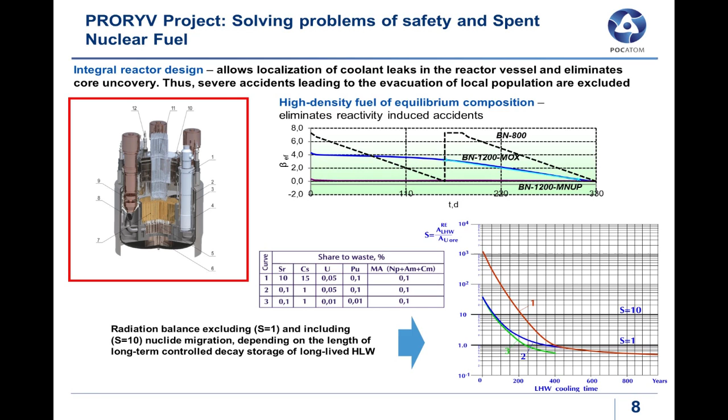There is a very interesting report here about coolant. I'm not in a position to read all of this chart, but I think it's very important what we have possibility with this coolant. We increase the natural circulation and decrease the loss of pressure. As an advantage, you also see this in the picture.

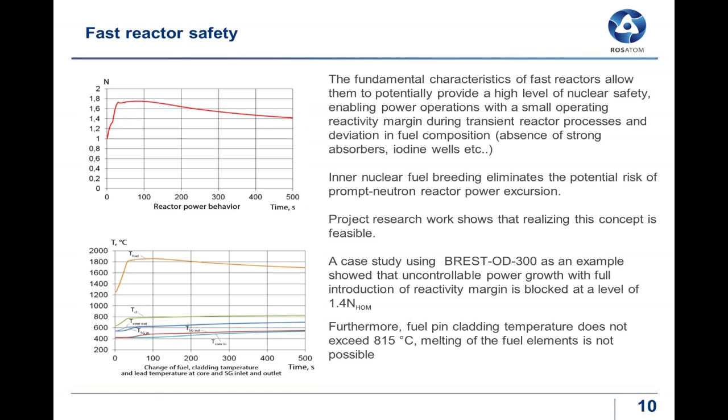This presentation exists in the files, so you can check that with this type of coolant, with this type of fuel, you have very good safety parameters which exclude evacuation of people even in a very severe accident. But the probability of such an accident is also very low. Please check it in the last sentence in this picture.

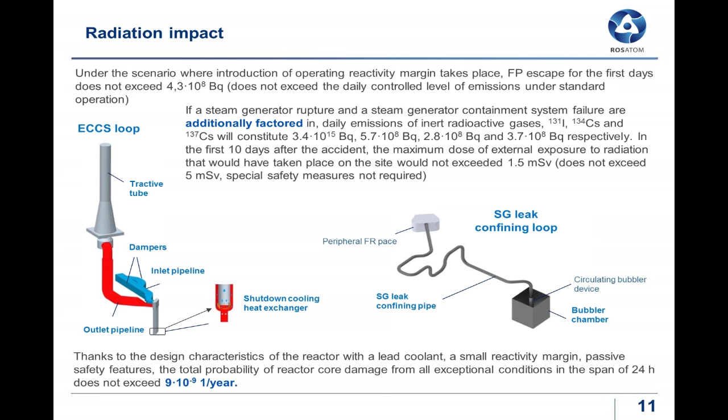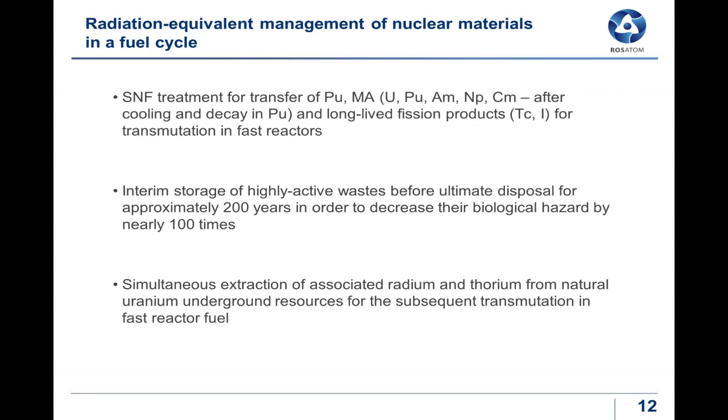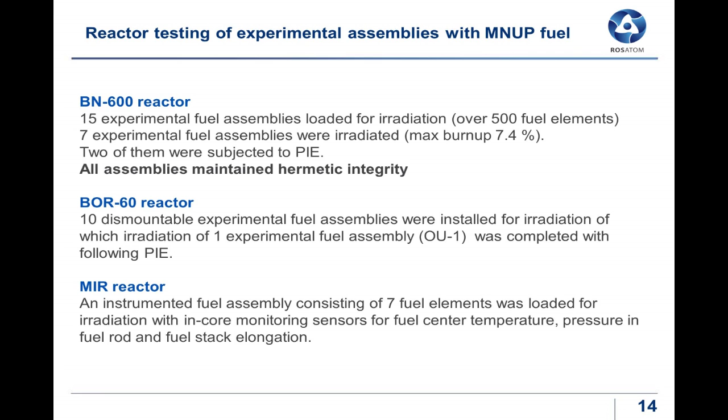There are several reports. In this conference, you will receive several reports which give details of such experiments, and I don't have the opportunity to stop on this.

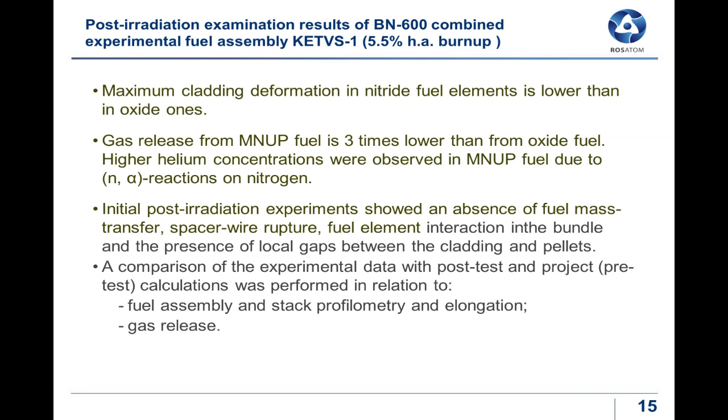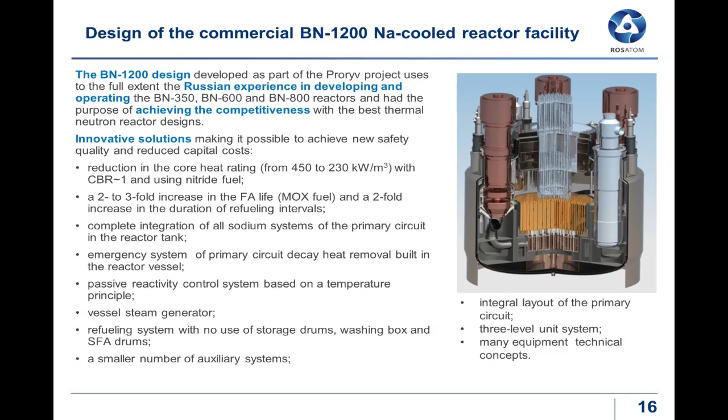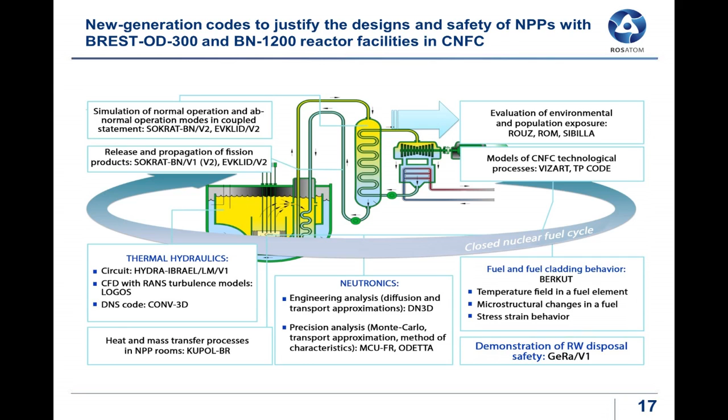Here you have information about new generation codes. Some of them are justified and some of them receive permission from the regulator. But for all of them, we expect this by the end of this period, 2020. It doesn't mean we finish the work this year, but what we do now, we think we will finish in this period.

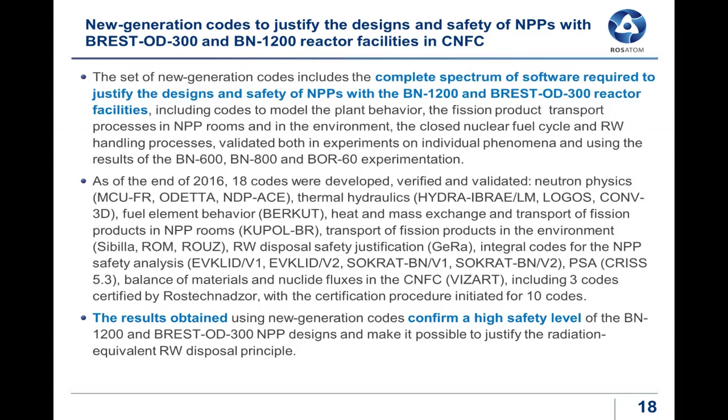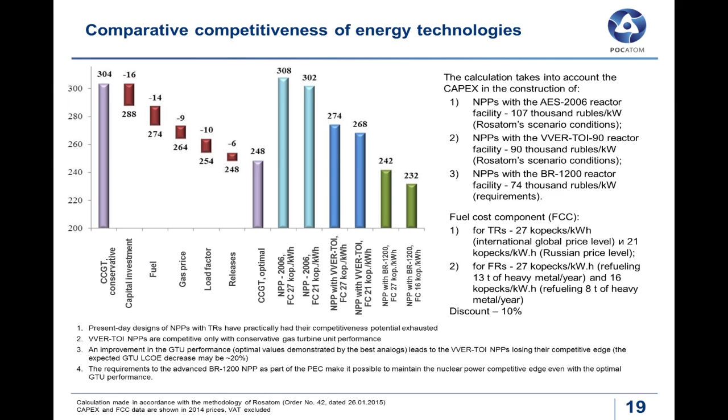There are three main conclusions. First, we not only have practice with existing sodium-cooled reactors, but in parallel we develop reactors with heavy metals, and a pilot project is now being developed near Tomsk.

In 5 years of the realization of this process, we think we will show the advantage of closed fuel cycle and fast reactors to resolve all the goals from which I began my presentation. Thank you very much.

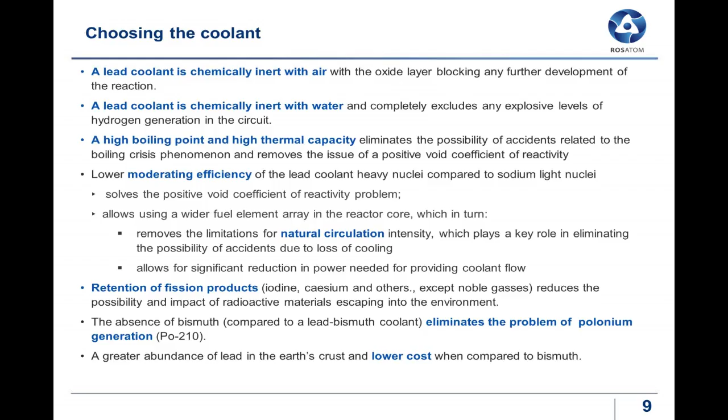Thank you very much for your question. Especially since you raised it, let me open this picture. You can check that all the goals can be resolved with all types of reactors, with all types of coolants. But with heavy metals,

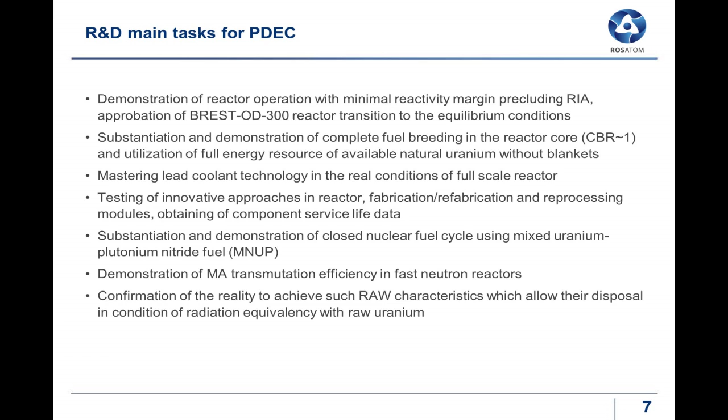we don't have such problems as fire or explosions, which exist when we use sodium. With lead or heavy metals, pins will have a bigger distance between them, and we have the possibility to decrease loss of pressure and receive better natural circulation. And there is no big difference between lead and lead bismuth.

Of course, if we use a eutectic of sodium and potassium, in such a case the melt temperature is room temperature. But if you use bismuth, lead bismuth, and lead, there are differences between them. In all cases, we need to heat the tubes to prevent freezing.

With bismuth, we have a problem with polonium. And lastly, the abundance of bismuth in the Earth's crust is not the same as lead. As a result, the price of bismuth is higher than the price of lead.

That's all. The next part of your question is why we develop both types. First of all, because we have more experience with sodium. And if we can resolve five of these goals with sodium, why not? And in the future, we can avoid the problems that exist with sodium if we succeed with lead. Thank you.

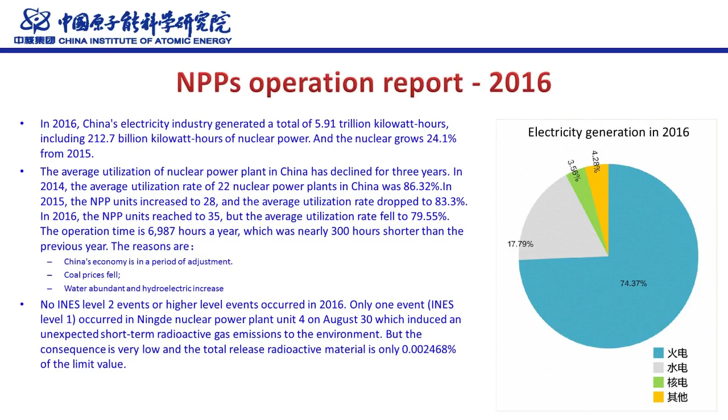There was no incident at INES level 2 or above. I think the PWR, or larger size nuclear power plants, and their continuous development is the base for fast reactor development.

So the second part is the sodium fast reactor. Last year our government issued the nuclear power energy development policy, focusing on safety and high efficiency.

We keep a development strategy in 3 steps: the first step is the thermal reactor, the second is the fast reactor, and the third is fusion in the future.

Now, and maybe for the next 10 years or more, the PWR is the main type of thermal reactor in China. We also plan for the closed fuel cycle to be developed alongside nuclear power stations.

So the task of the fast reactor, I think, is to support the sustainable development of nuclear energy, including raising the utility ratio of uranium resources, and the transmutation of long-life radioactive products from the reactors.

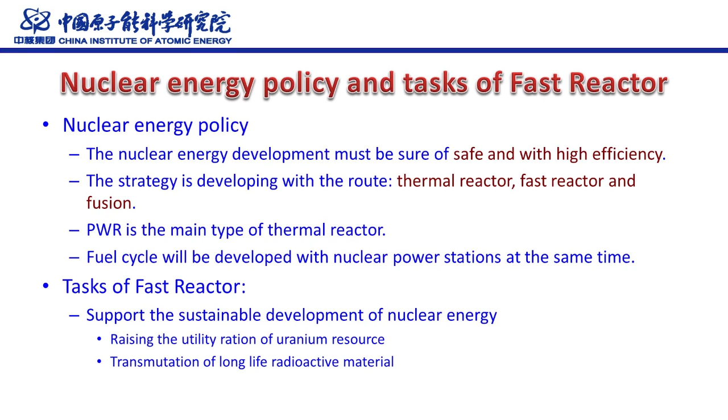Concerning the fast reactor development strategy in China, we can say there are 3 steps. The first step is CEFR, which has been in operation since 2010, and we already finished its construction.

The third is the commercial reactor, the China commercial fast reactor, based on operation experience of CEFR and the CFR600.

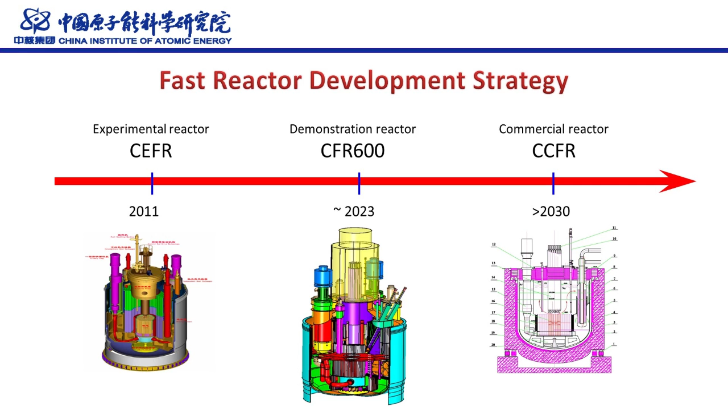As you know, CEFR is the first fast reactor in China. Its thermal power is 65 megawatts, and its electrical power is 20 megawatts. It uses uranium oxide fuel and is a sodium-cooled pool-type fast reactor.

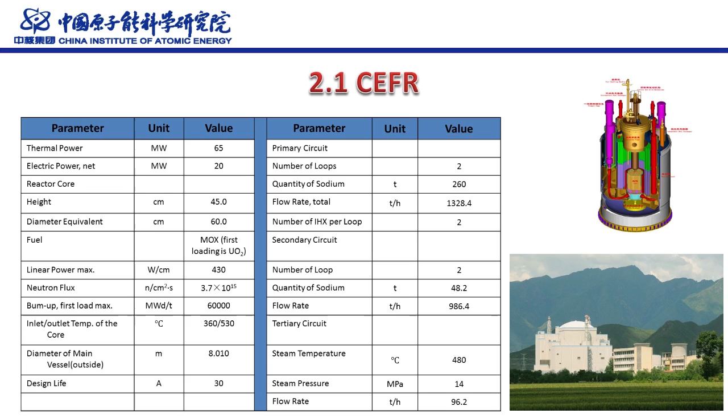In the last year, in 2016, the CEFR operated 23 days at nearly 40 megawatts thermal power. This means that for most of last year, the CEFR was in overhaul.

Overhaul includes periodic maintenance, such as the primary and secondary sodium pumps, and the fuel handling machine, and also update work. Update work includes the thermal insulation system, especially in the sodium loop rooms, and also the digital control system in the main control room.

We also needed to make some repairs and rectifications, including the nuclear island auxiliary system, instruments and industrial television system, radiation monitoring system, electrical system repair, safety system, and reactor protection system. So it was really hard work, also done with the support and help of Russian experts.

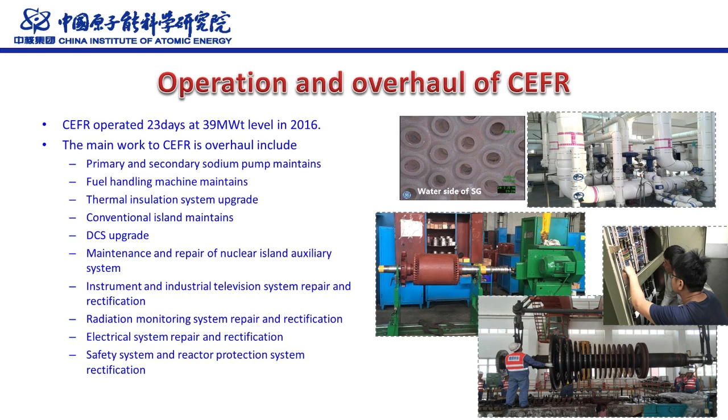And the CFR600 is just in design. We already finished the preliminary design and submitted the preliminary safety analysis report to the nuclear safety authority agency in China. The CFR600's thermal power is 1,500 megawatts, and the efficiency is 40%.

And we also consider using MOX fuel, and we keep the breeding ratio larger than 1.1. So we decrease the core damage frequency and the frequency of large radioactivity release according to the very high level required by our safety authority.

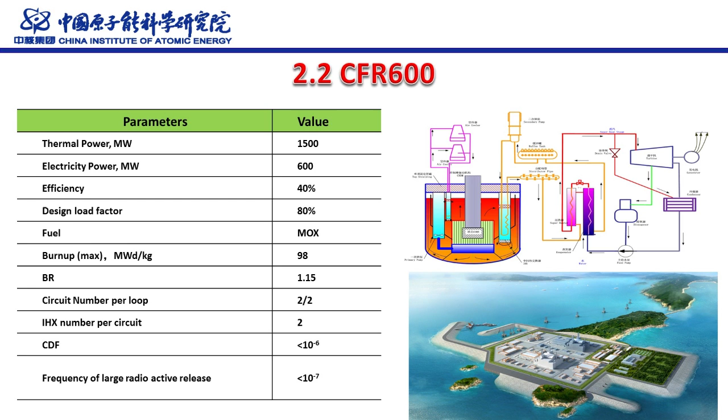In this case, we developed the sodium fast reactor fuel and core materials, focusing on the fuel cladding, including 316 stainless steel and the China-produced chromium 15 nickel 15 steel. Also included are ferritic/martensitic steel and oxide dispersion strengthened steel. Here I will introduce the CN1515.

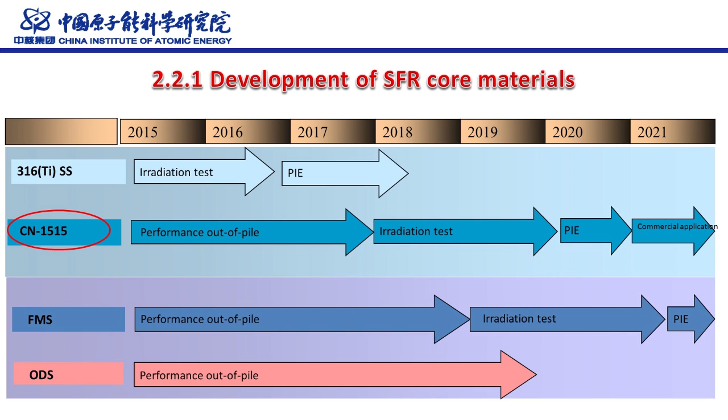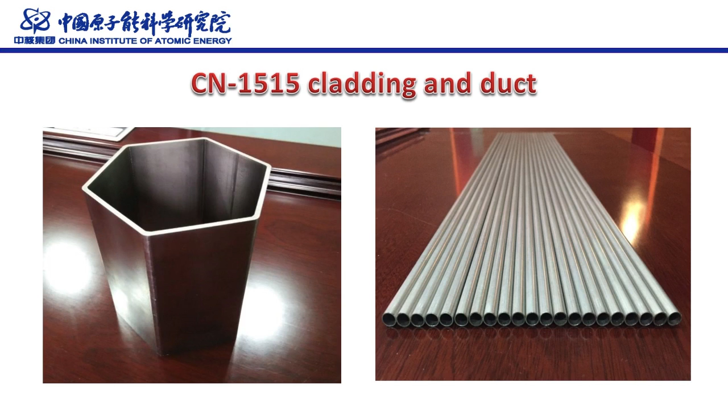We also have the plan for the irradiation test, post-irradiation examination, and after that, the application. Here is the picture of the CN1515 cladding and the duct fabricated in the factory. Also, we made the irradiation device for these materials. We will put it into the CEFR later.

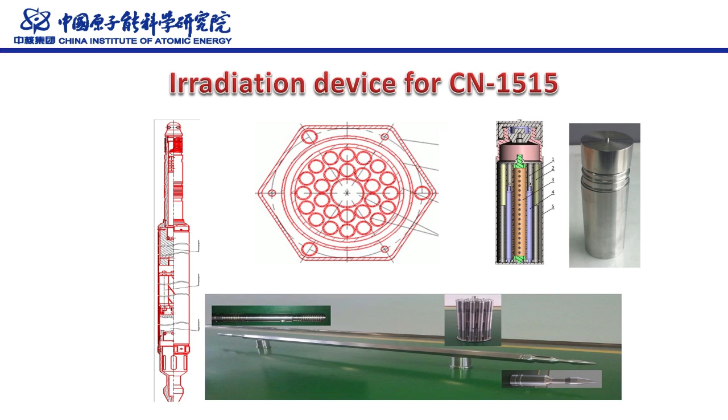About the ODS alloys, we combined with some organizations to develop them together, including the China Iron and Steel Research Institute Group, the University of Science and Technology Beijing, and also CIAE. We also got some parameters of the ODS.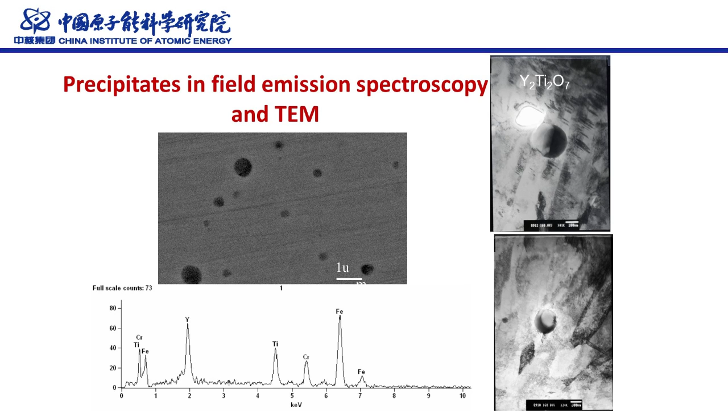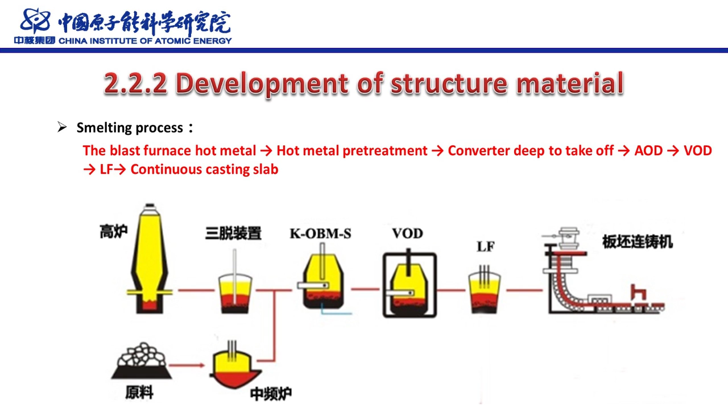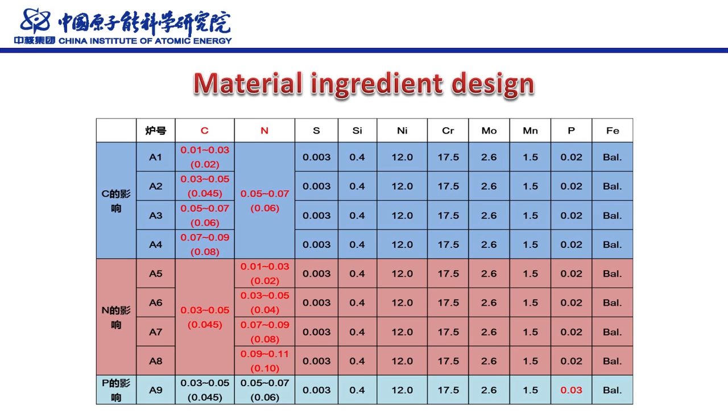We also got the materials ingredient design of the ODS, and we made the analysis of some elements' influence on this material. Some curves show the deformation resistance control of 316KD and 316LN stainless steel.

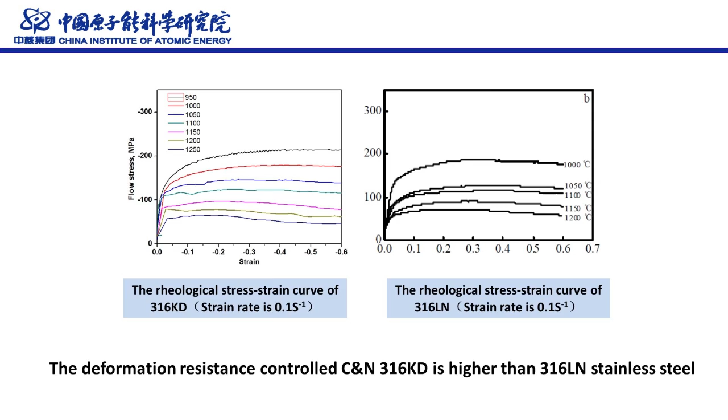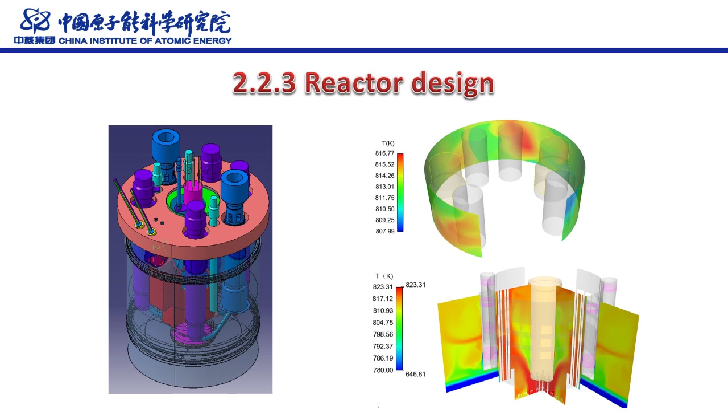Concerning the reactor design, here the picture shows the reactor block and, in the pool, some thermal flows, and the safety analysis results. So the next part concerns the fuel cycle.

In China, we consider the closed fuel cycle to include two steps. The first step is based on the fast reactor with MOX fuel. We use the MOX fuel fast reactor combined with aqueous reprocessing plants and high-level waste disposal plants to build the closed fuel cycle. We hope we can realize it before 2030.

After that, we also consider developing metal fuel in the future in the commercial fast reactor to get a higher breeding ratio, and to enlarge the number of nuclear plants based on fast reactor technology. Based on the metal fuel, we need the pyro reprocessing plants in the near future, near 2050.

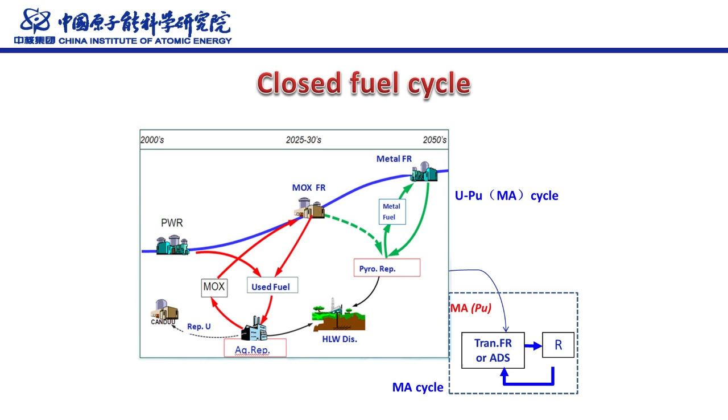The two steps: the first step is based on the CEFR, at laboratory level, for the closed nuclear fuel cycle. We built the CEFR, and then we used the reprocessing pilot plant. At the pilot plant, the pool storage capacity is 550 tons of heavy metal, and we also already built the reprocessing and radiochemistry laboratory, including 9 hot cells, 5 warm cells, and glove boxes.

So it's a big laboratory for radiochemistry, and we also built the MOX laboratory, including the 500 kilogram per year MOX fuel plant, and the CEFR test subassembly fuel is being made and will be put into the CEFR for irradiation.

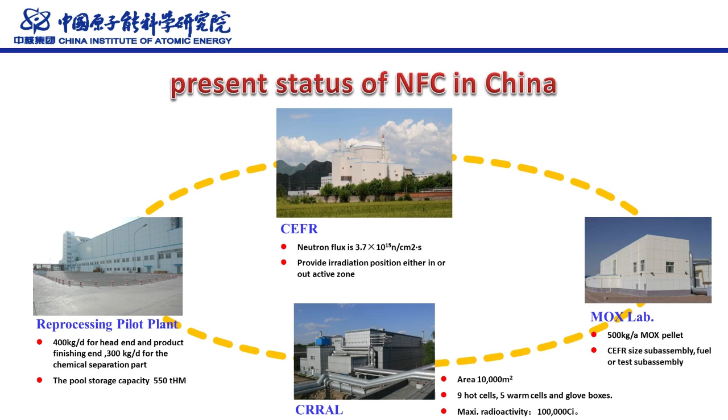The second step is the industrial development of the nuclear fuel cycle. In our consideration, in 2030, we will realize the middle industrial scale of the closed fuel cycle, including the fast reactor, the reprocessing plant, and the MOX factory.

Now, from 2008, the significant research project on reprocessing was initiated. And we have the plan to start the MOX plant and the fast reactors. Now it is approved by our government. And also, we selected a site to build the high-level waste treatment plant.

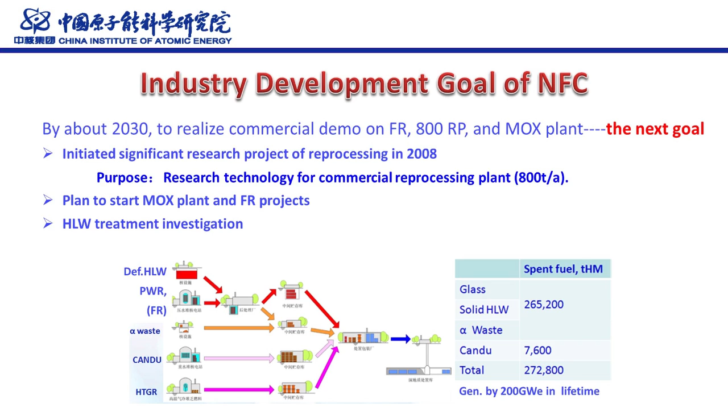So finally, our conclusion is that the nuclear energy of China will be significantly developed, with challenges. The challenges mainly focus on inland sites, and also the economy. As you know: cheap coal, the rapid electricity price decrease of solar and wind, the high capital cost of nuclear power plants because of the high safety requirements; that's also the challenge.

And the second point is that in China, several new generation nuclear energy systems are under study to meet the future demands. These include the sodium fast reactor. Also, we have the plan to build the traveling wave reactor, and the lead fast reactor with the accelerator-driven system, and also the molten salt reactor and very high temperature reactor in China.

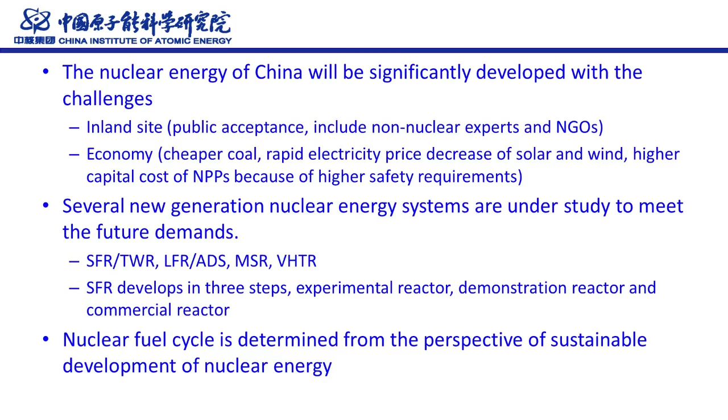When we talk about the sodium fast reactor, we also consider 3 steps. The experimental fast reactor is CEFR, the demonstration reactor is CFR600, and the commercial fast reactor in the future after 2030. Finally, we say that the closed nuclear fuel cycle is decided from the perspective of the sustainable development of nuclear energy.

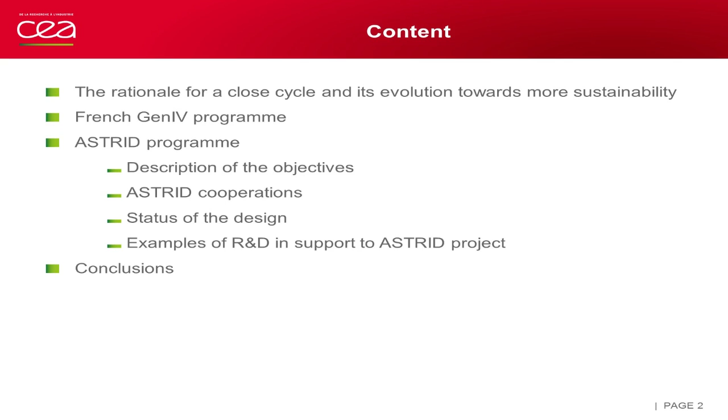So let me begin with an introduction on the closed fuel cycle. Spent fuel reprocessing and recycling were implemented in France more than 30 years ago, and processing spent fuel allows us to salvage recoverable material, whereas the other compounds are considered as ultimate waste.

All the plutonium recovered by reprocessing is recycled in mixed uranium-plutonium oxide fuel, called MOX fuel, whereas fission products and minor actinides are incorporated in glass, then stored pending their final disposal. This policy has a number of advantages in terms of resource saving, plutonium inventory control, reduced ultimate waste, which does not contain large quantities of plutonium, and safe packaging of this waste.

However, multiple plutonium and uranium recycling is not achievable in the current fleet of water reactors. So what about the long term? In order to preserve and to prepare the possibility for the next generation to use nuclear power, uranium resources should be preserved and the waste burden should be minimized. The complete closing of the plutonium and uranium fuel cycle is an answer to this concern.

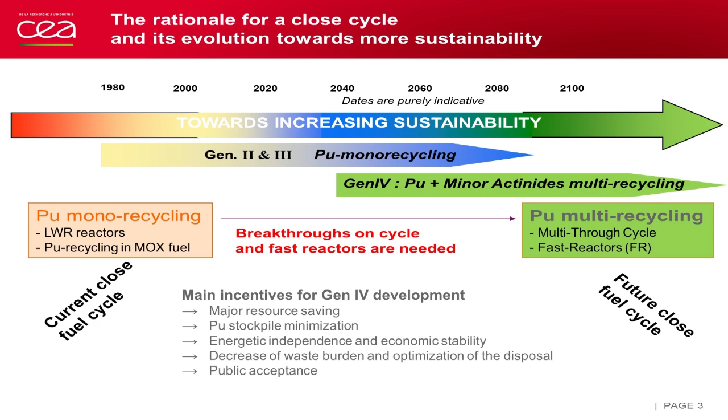Among the 6 reactor systems of the Generation 4 International Forum, France pays interest to 4 of them. And France carries out research on those 4 systems, of course, at very different levels: sodium-cooled fast reactor, very high temperature reactors, considered through materials requested by such reactors and through hydrogen technologies earlier developed by the CEA, also gas-cooled reactor and molten salt reactor.

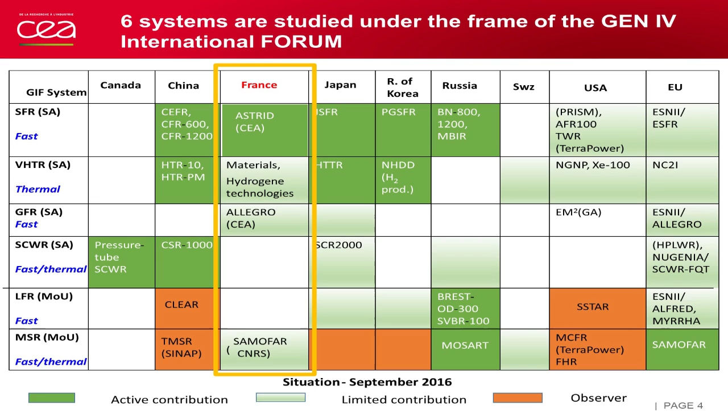The French Generation 4 program focuses on sodium-cooled fast reactors, considering both the reactor and the fuel cycle. In fact, France has brought a major contribution to the development of those reactors in the past decades. Yet there is a strong connection between the technological maturity of the process and nuclear safety. Technological control associated with significant experience feedback contributes to guaranteeing the safety level of a system. And amongst the 4th generation fast reactor systems, only the sodium fast reactor has a sufficient knowledge base in France to meet the technical and operational expectations of a 4th generation system in the medium run.

With this in mind, I would like to emphasize again that the French fast reactor program also includes an active survey and some specific studies on other Generation 4 systems through the European projects, through the tasks of the GIF, and specific cooperation agreements. And I will move forward to the second part of this talk to give you an overview of the ASTRID project and of the development underway at the time being.

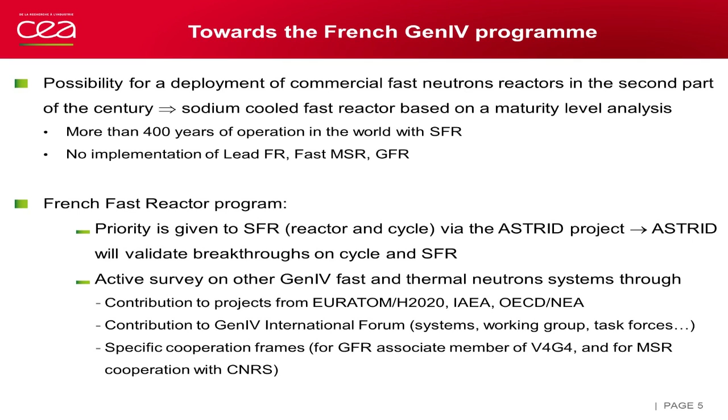The name ASTRID expresses the general objectives of the reactor. ASTRID means Advanced Sodium Technological Reactor for Industrial Demonstration. It is neither a prototype nor a first of a kind. Its objective is to ensure that a fourth generation reactor type achieves technical maturity for the second half of this century. And based on the experience feedback of past sodium-cooled fast reactors, ASTRID is designed to demonstrate the relevancy and performance of the technology breakthroughs and of the innovative options at an industrial scale, in particular in the field of safety and operability.

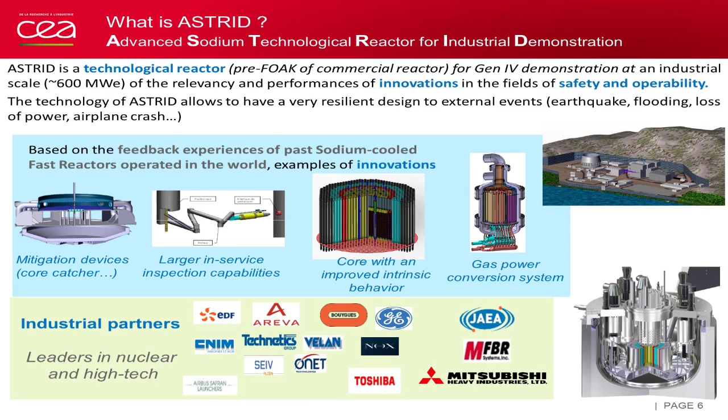The CEA is the leader of the ASTRID project. A design core team has been organized through a set of bilateral collaboration agreements, and at the time being, 15 industrial partners have joined the ASTRID project. The organization is shown on this slide. The role of the CEA involves the operational management by a project team also in charge of the industrial architecture, the management of most of the R&D work and qualification of technical options, the assessment of studies carried out by our industrial partners in charge of technical work packages, and the direct management of the core work package.

So as I said, the CEA has set up bilateral partnerships with key industry partners in France and abroad. The partners provide both technical and financial support. Support to the CEA project owner team is provided by EDF. The design is organized in engineering batches. Areva NP shares the design of the nuclear island with a consortium of Japanese partners, JAEA, Mitsubishi Heavy Industries, and Mitsubishi Fast Breeder Reactors. General Electric is in charge of the power conversion system. Bouygues carries out studies on innovation for civil engineering. NOX is in charge of the balance of plant, and SEIV of the post-irradiation experiments hot cells.

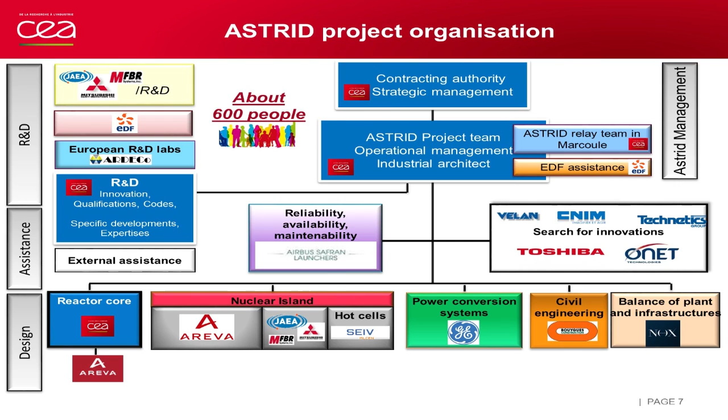The main industrial cooperation on the Astrid project is a cooperation with Japan. Both Japan and France have developed technologies for sodium fast reactors for several decades. Collaborative R&D arrangements exist for a long time between the two countries.

A common will to cooperate on the Astrid project emerged in 2013, leading to a general arrangement signed in May 2014 at government level, followed by an implementing agreement signed by JAEA and Mitsubishi Heavy Industries and its subsidiary Mitsubishi Fast Breeder Reactor, Areva, and the CEA.

This shapes the principles and the governance of the R&D and design activities with several task sheets describing the technical program, the deliverables, deadlines, and so on. In the design field, the Japanese team contributes directly to the Astrid basic design on 3 topics: active decay heat removal system, control systems, and seismic isolation system for the reactor building.

The R&D field is wide and with a lot of other topics. And after nearly 3 years of common work, it has been shared that collaboration is efficient and fruitful, and so the discussions continue to enlarge the shared scope, in particular in the design field.

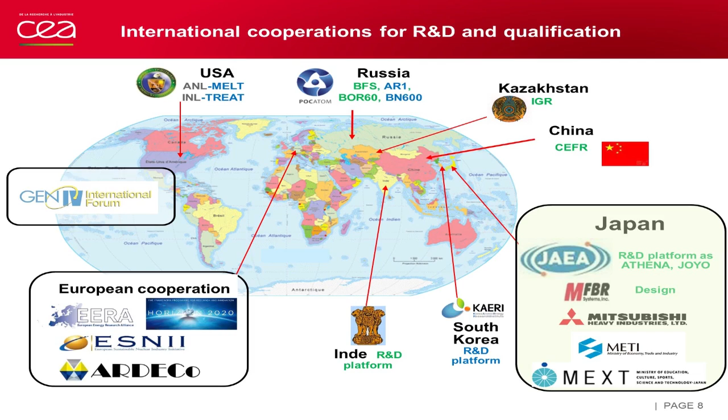Now let's see the Astrid project in itself. In December 2015, the Astrid project met a milestone of the end of the conceptual design, and the CEA delivered 2 synthesis files to the French government and got the authorization to proceed to the basic design phase until the end of 2019. The reactor itself has the main technical options as shown. I won't comment on them because presentations in parallel sessions will go through the details of it.

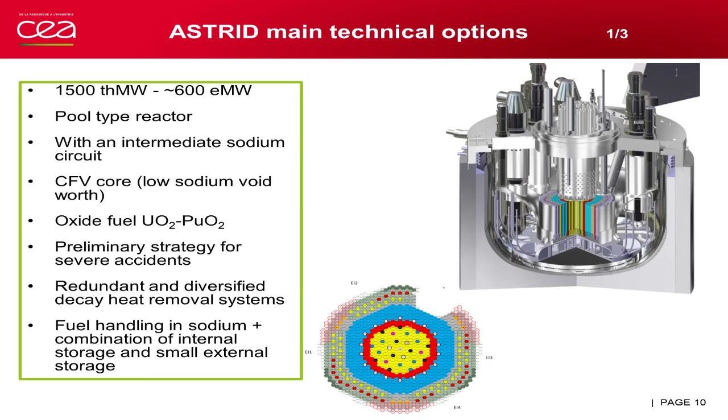2 options are considered for the power conversion system. During the conceptual design phase, the reference configuration was a steam-water power conversion system. This mature option benefits from a large experience and tens of unique operating years. Steam generator design improvement allows to reduce the risk of sodium-water reaction occurrence and to mitigate its consequences in case of a hypothetical violent reaction.

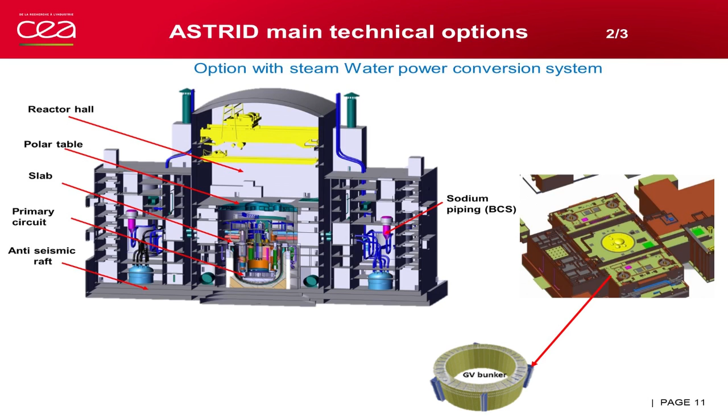Another way of dealing with this reaction is to avoid water in the power conversion system, and that is why the second option of power conversion system is considered. In this very innovative option, the sodium-water reaction risk is inherently eliminated by replacing water by an inert gas. No showstopper has been identified so far. So the direction remains to increase the maturity level of the gas PCS configuration while keeping the 2 options open, gas PCS or water-steam PCS.

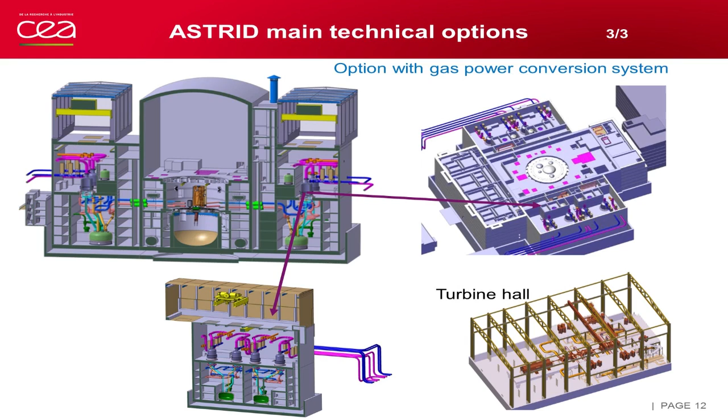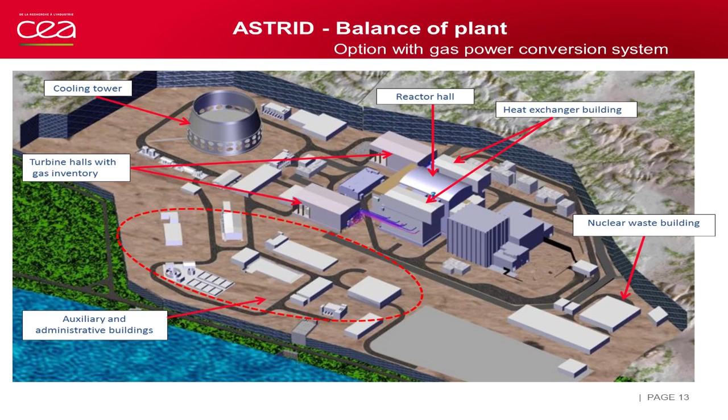In addition to the available experimental platforms in other countries, the French fast reactor program includes investment in R&D facilities with the refurbishment of the Masurca critical mock-up, the new Cheops hall for large-scale sodium loops, the Plinius 2 facility for severe accidents and corium behavior R&D. And of course, the existing platforms are used to carry out experimental validation of new concepts.

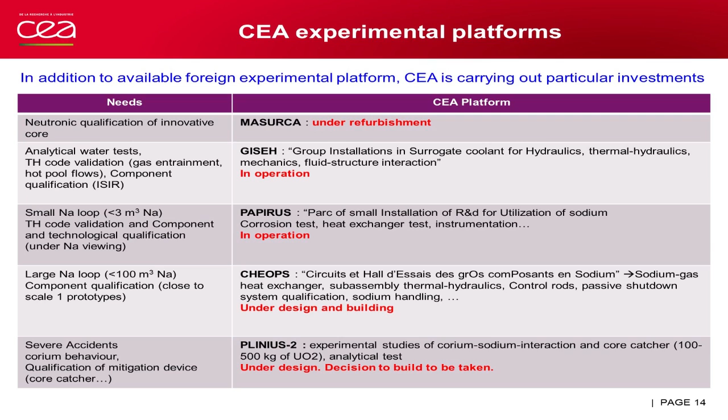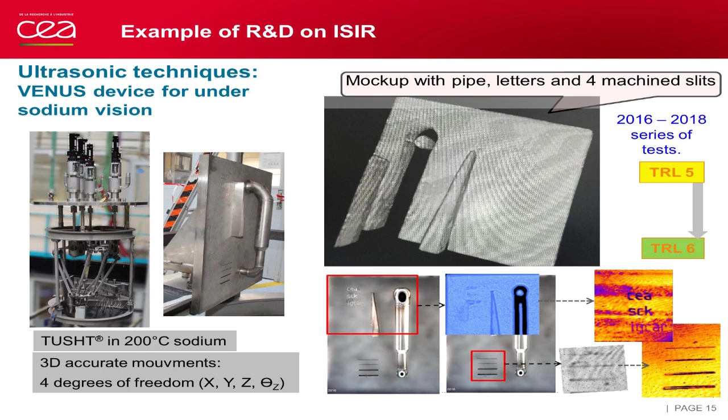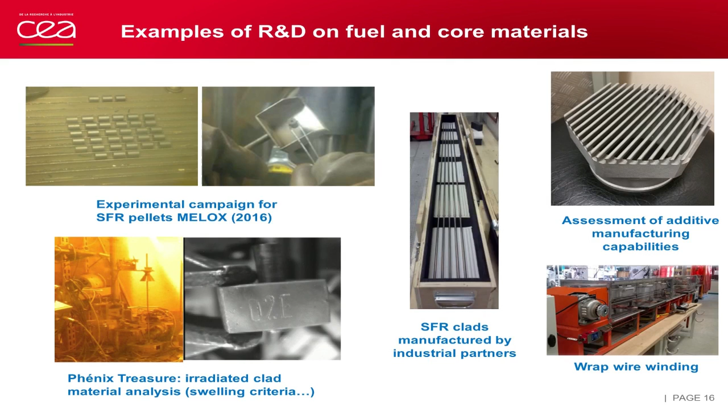So to wrap up and conclude this presentation, I emphasize that since nuclear energy is a well-proven source of large baseload electricity with no greenhouse gas emission, it will remain one of the pillars of the low-carbon energy mix in France. The closed fuel cycle associated with fast neutron reactor will lead to drastic improvements in uranium resources management and important reduction in footprint and radiotoxicity of final wastes.

In this context, the French program on Generation 4 systems is based on the Astrid program on one hand and on active survey on other Generation 4 fast and thermal neutron systems on the other hand. The basic design phase of the Astrid project is ongoing until 2019. Schedule and organization for the next phase are under preparation with the French government in the framework of the French-Japanese partnership and with our industrial partners.